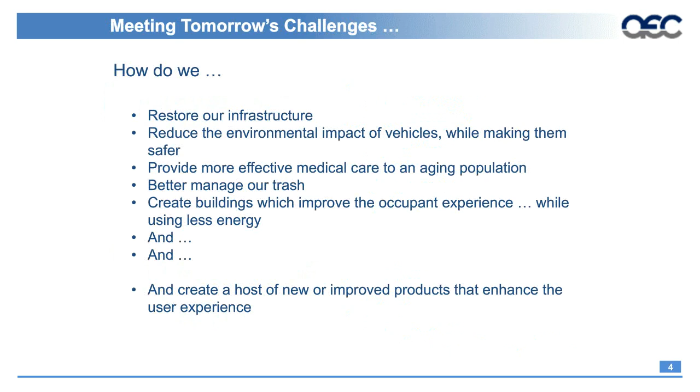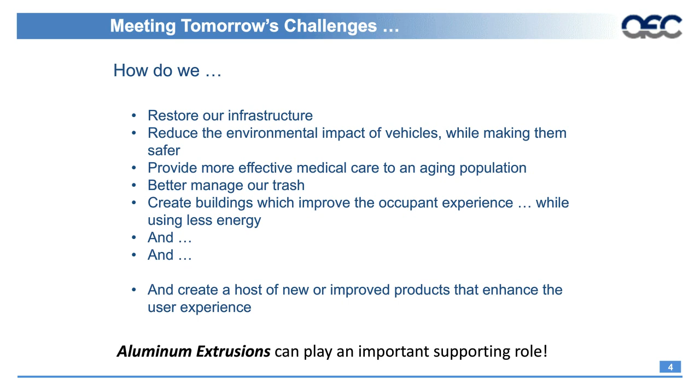Today what we're going to do is take you through a few real-life examples of what different extruders are working on—improving not only our infrastructure, but also working on vehicles and improving the impact systems of vehicles to make them safer, as well as working on a variety of life-enhancing medical products that enhance not only patient care but also help reduce costs. We will start by reviewing the extrusion process overall, and then we'll get into some of the different products and applications, as well as more detail within the aluminum extrusion industry.

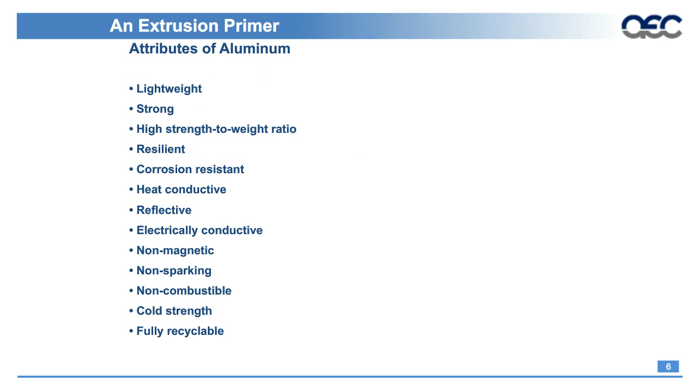Obviously, we are aluminum extruders, so our material of choice is aluminum. Aluminum has a variety of benefits: it's light, strong, lightweight, and resilient. Corrosion resistance is probably its most key attribute. When we marry aluminum with extrusion, we have the ability to tailor the performance or profile to meet specific needs. We're able to produce complex shapes, apply a variety of different finishes like anodizing and paint, as well as make hollow profiles that are relatively consistent and uniform throughout the production process.

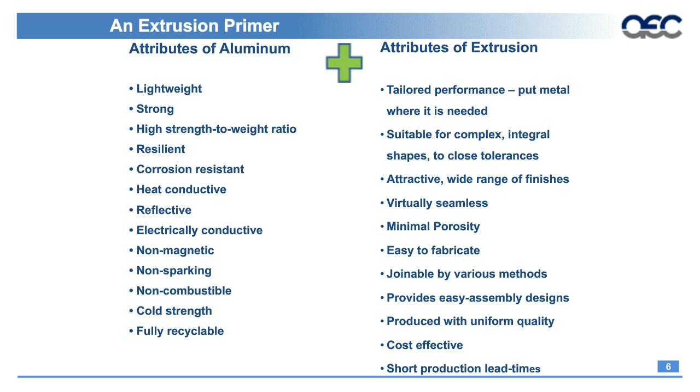As aluminum extruders, I think we're all very familiar with this example, but in its very simple form—maybe some of us had the opportunity to have one of these as kids, or have kids who have had these—think of the Play-Doh machine. What we do is basically take a piece of aluminum, force it through a steel die, and out the front comes the particular extrusion we're producing.

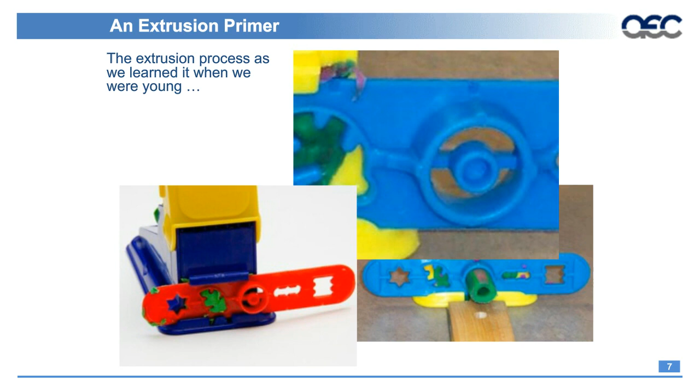For this particular example here, just basically see the die in the middle. Obviously, you have the billet to the left, and then the extrusion emerging through it. So it's nothing more complex than that, really.

Obviously, all the features of the extrusion itself are built into the die and how that actually forms the material. So it's overall relatively simple.

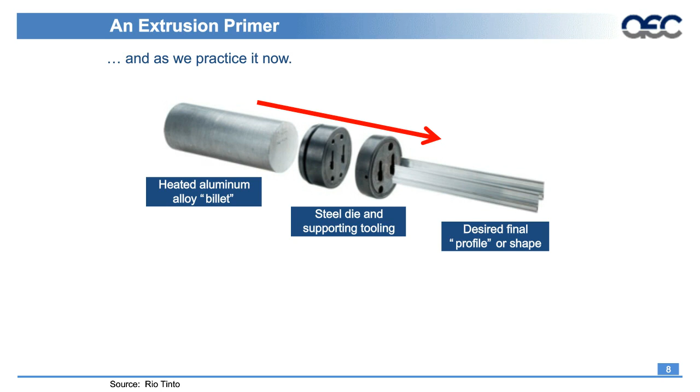However, as we begin to look at the different parts of the extrusion production line, we begin to understand that it is more than just a die or more than just the extrusion press. In fact, what we're actually doing throughout the extrusion production process, in order to achieve the different tempers we're looking for and the variety of different alloys that we produce, at the end of the process we're going through a variety of heat and cool down cycles to make sure that we're treating that aluminum alloy in the right way to achieve the final properties at the end.

So in this particular instance, you see a very basic diagram of most of the extrusion process. There is some additional ancillary equipment towards the end if we're looking at packing and doing things like that. But the actual production of the extrusion itself, we start by preheating the billet before it goes into the extrusion press. So we'll preheat the billet.

We'll present the billet to the extrusion press. We will press the billet through the die, and that will run out basically down the table that sits in front of the extrusion press, and then we'll do a hot sawing operation where we'll cut that long extrusion to a piece. Then it moves transversely to a stretching system where we'll straighten it, and then a finish saw operation where we'll cut it to basically a rough cut length.

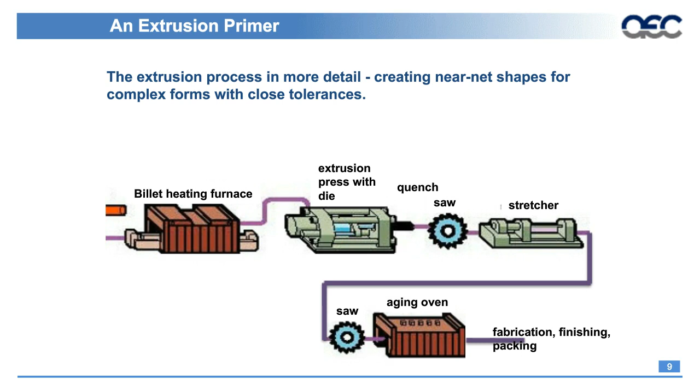So again, I mentioned about basically the heating and the cooling process. So what we're doing in that, and you can see from this diagram, starting on the left, which is basically down around room temperature, once we start to move that billet into the billet heater, we're beginning to heat that up, and that process takes a very varying amount of time depending on the diameter of the billet being pushed, or the length of the billet, or the alloy. But there always is a prescribed recipe for that particular shape as to what temperatures you're trying to achieve along the way.

So you can see, starting from the left and moving to the right, that basically you're taking that billet, you're beginning to heat it, and you're getting it to a preheated or pre-extrusion temperature of around 800 degrees. Like I said, it will depend on what the alloy and the shape is, but it'll be somewhere around in that area.

But the final heating that occurs to the shape actually occurs during the extrusion process, which is obviously very much all about the friction, the frictional heat that's put into that extrusion. Now what happens during the extrusion process, obviously we're making the final shape that profile is going to be, but then we're also heating it up to the point where all of the alloying components within that aluminum alloy go into solution. So at that time, all of those alloying elements have been uniformly dispersed throughout the cross-section of the extrusion profile, and it emerges from the press.

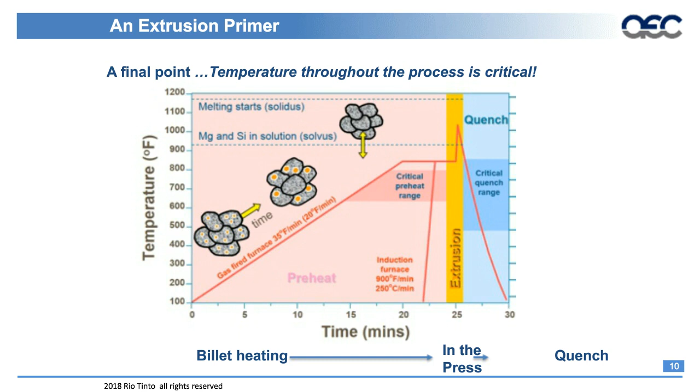As I mentioned in the beginning, we'll talk about some of the different challenges and then some of the solutions that face us today. Over the past several years, we hear different things about the infrastructure, what is needed, what needs to be replaced, and what the opportunities are for aluminum extrusions within that space, as well as healthcare and automotive. All those have some very specific needs where aluminum extrusions tend to offer significant value.

Particularly in the United States today, you don't have to go very far to hit a pothole or even see a bridge that might look like it needs to be repaired. What we do know is that there are over 56,000 bridges that are structurally deficient, which is 9% of the total. If you look at all that, that's $123 billion of estimated rehab based upon current construction methods today.

One of the things about aluminum that we talked about before: it's lightweight, it has a high strength to weight ratio, it's corrosion resistant, and it also has cold strength. What does that mean? In a cold environment, it doesn't become brittle, it still maintains its strength. That's why aluminum is used for airplanes. Go up at altitude where it's minus 30, minus 40 degrees, and the aluminum is still flexible so that it doesn't crack and cause some type of accident with the airplane.

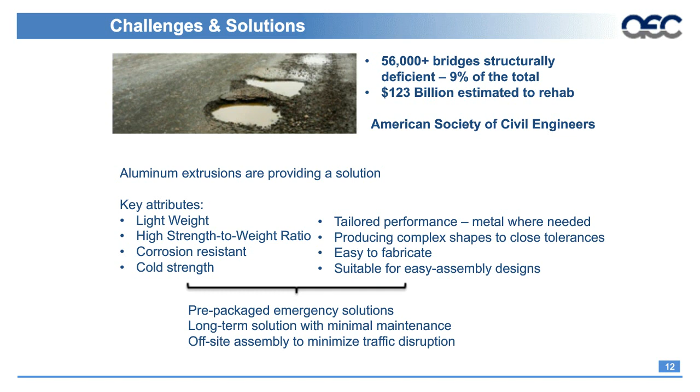So it's one of those things where we can look at all of these attributes combined together, along with the shapes and how everything will basically work together as a system, to come up with a solution that is, I'd say, better and can even be more cost effective than what we're looking at today.

One of the industries that a lot of extruders participate in has some type of military application. In this particular application, you have basically a modular bridge that's able to be assembled on site for foot traffic, moving small equipment, different things like that. But the biggest thing about this is, due to the lightweight and the way you can actually design the extrusions, you can erect this in the field with minimal amounts of tools and equipment. That's very important to a mobile military.

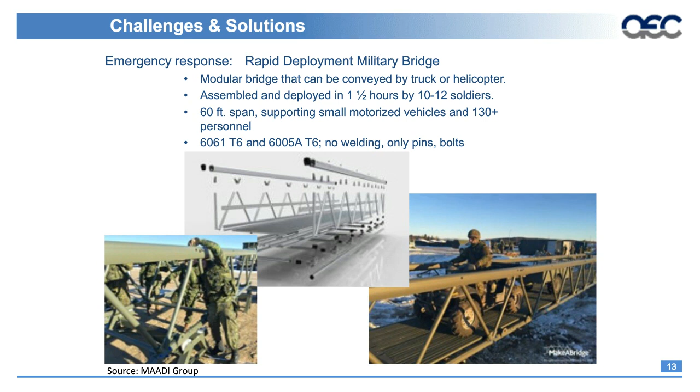But probably more important to us in the civilian world is the fact that a lot of these bridges are deficient. One of the opportunities for one of the products designed by a company called AlumaBridge is actually aluminum bridge decking. There's been several of these bridge decks already put in place. There's been extensive studies done in the state of Florida on bridge decks and looking at ways to utilize a bridge deck versus steel grating construction, concrete construction, and all the different methods out there today.

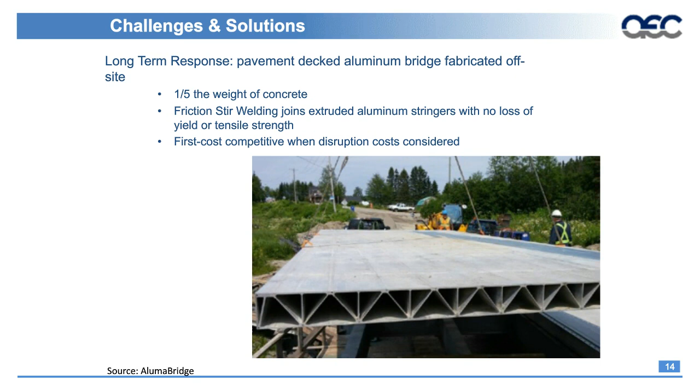In this particular bridge example, you actually have several very large extruded multi-hollow sections that are friction stir welded together off-site. So basically these bridge decks can be pre-built in a modular fashion and then moved to the bridge site. This decreases the amount of time that bridge is actually out of service, which is a key part when we think about daily life and the interruptions you face during construction. So with the aluminum bridge deck, you're looking at a rapid deployment of a bridge.

So there's definitely a lot of great opportunities out there to look at aluminum in infrastructure applications, where not only will it save costs because the supporting structure of the bridge doesn't need to be as robust to take the weight of the deck, but you also look at the speed at which you can implement that new bridge and basically reduce the amount of disruption to traffic flow.

Another great opportunity to talk about is within the healthcare industry, whether it's a patient comfort or a cost issue. We can look at aluminum extrusions as offering a potential solution to a problem.

Again, usually with aluminum, we're always talking about the weight implications. So the lighter a component is, typically the less structure it's going to take to hold that, to support that as it's in use.

The non-magnetic, non-sparking, non-combustible attributes of aluminum are very important when we're talking about healthcare and parts being in the vicinity of a patient, sometimes right next to the patient.

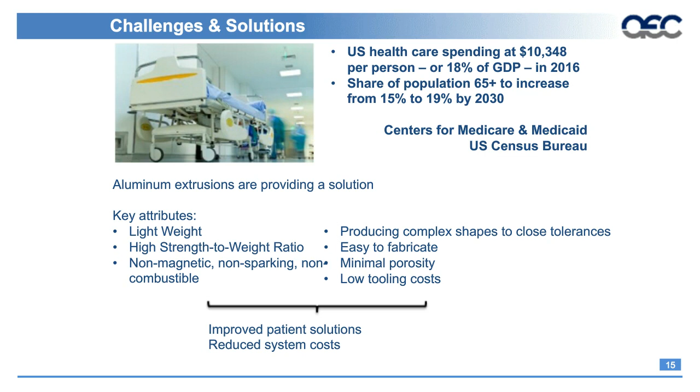But because of all the different leaves, they had a tendency to break, and therefore the machine would go out of operation. I think we've all been in a situation where we've had to get in for some type of test, and if the schedule is blown because the machine is down, you have to rearrange your whole time and try to get back again. Not a very comfortable feeling.

So in this particular instance, they wanted to reduce downtime, but they really wanted to reduce their part cost at the end of the day. They wanted to make a more efficient machine, and they wanted to be able to build it more efficiently.

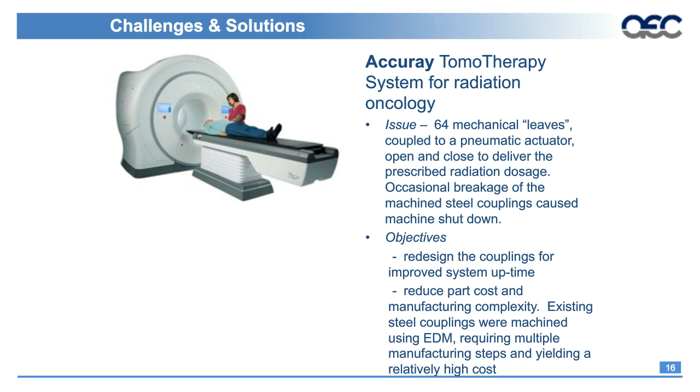In this instance, this coupling was replacing an EDM steel coupling. They used a 6063 machined aluminum extrusion that was hard coat anodized. Because of the extrusion process and being able to basically move the metal where you need it within the profile, they were able to improve the strength and durability of the part.

They also had the opportunity, because of the extrusion and fabrication processes, to build in an identification mark on the part, which is very important for traceability. If you do have a malfunction, you'd like to be able to trace that back through the supply chain and identify any reasons for the failure to make improvements.

In this instance, on the bottom, you can see the fully fabricated part, which was actually a snap fit. It reduced the manufacturing cost by nearly 90% and the production time by 75%, so it became a very cost-effective part to produce.

But the more important fact is, through 10 million cycles, it didn't have any failures, which provides a lot more uptime for the machine. So not only are the patients happier, but the hospital system is getting more people through the machine, which makes the hospital happier because they're collecting more money at the end of the day.

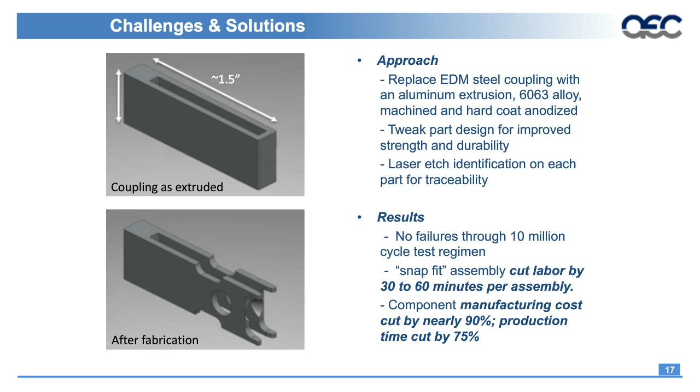One of the things about extrusions and aluminum is that speed to market is always very important. Here's a particular piece of equipment used to aid in the turning of a patient on the bed, which is actually a very time-consuming task for hospital care staff repositioning patients.

In this instance, there were seven extrusions joined together that worked together to aid in turning the patient, which they were able to do in 10 seconds versus a much longer time than it had taken before.

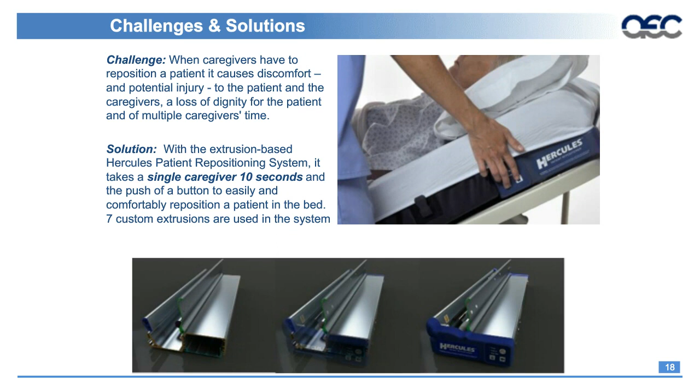Obviously, much of the time we start talking about the automotive space. Over the last 5 to 8 years, aluminum has begun to, or has, taken off on a very fast trajectory of being utilized more within the automotive space.

Again, within automotive, there's talk about lightweight vehicles - way lighter today, with the high strength to weight ratio, resilient, corrosion resistant. But I think the biggest opportunity within the automotive space is to be able to tailor the performance of the product, which we'll see in a little bit when we start talking about the crush boxes and bumper beams, and all of those types of energy absorbing components, where the consistency of extrusion throughout the process leads to very consistent products which perform in a predictable manner.

So it's one of those opportunities I think that we rarely see within a particular industry, and for extrusions there's a great opportunity to continue the growth process as new vehicles are developed, whether they're an internal combustion engine, a hybrid vehicle, or an electric vehicle - much of the same attributes play into all of those different vehicle types.

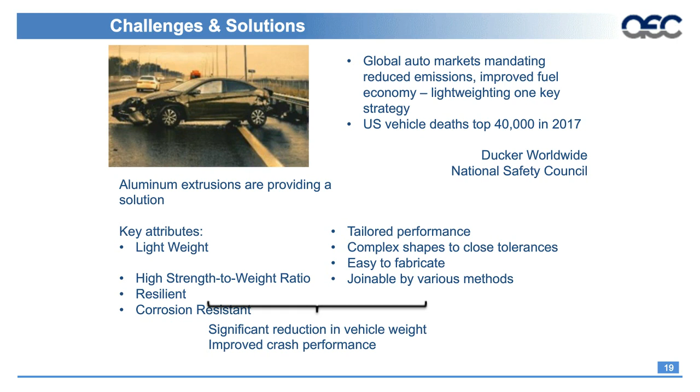So here's a little bit of information as far as the growth and the projected growth of extrusions within a vehicle over the next 10 years, starting in 2012. But again, you see some of the different areas where they've been used. Obviously different vehicles have different designs - again, it goes back to easily tailored.

A lot of times, extrusion dies are one of those things that, depending on the size of the die, will really garner the size of the profile. But typically for a relatively complex hollow shape, you could be looking at somewhere around $5,000 to $7,000 for a die, versus sometimes in the stamping world you could be talking about hundreds of thousands of dollars for a die to be able to stamp a part. So it's quite a bit different when we start talking about new tools and what you can do.

I think the iteration process is a lot faster within aluminum extrusions than it is with some other types of metalworking equipment, whether you're talking about castings, forgings, or stamping operations. You have a lot more freedom with aluminum extrusions to iterate new designs, because typical lead time for a die might be 5 to 7 weeks, depending on how complex it is and where it comes from. So it gives you that ability to move that process a little bit faster.

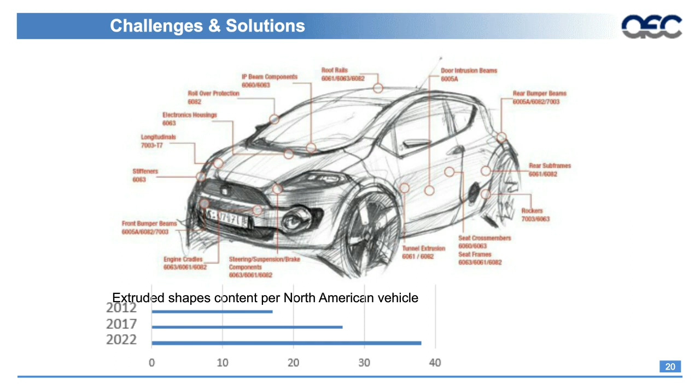Obviously, over the last few years, the Ford F-150 has been a great story when it comes to aluminum - not only the weight savings, but the fuel savings, and also the safety performance of the vehicle itself. And here we talk about one of the crush cans that's specifically designed. You can see on that upper right-hand picture on top there, where they're actually pre-dimpled, so they're made to begin the crush process within there.

So at the end of the day, look at the weight savings, which translates to fuel savings. Obviously, even the weight savings not only transfers to fuel savings, but then also you talk about less mass of the vehicle, so there's less force to have to absorb in case of an impact. So there's a lot of things that you begin to gain through weight savings and being able to tailor the profiles to the specific application where they're going to be used.

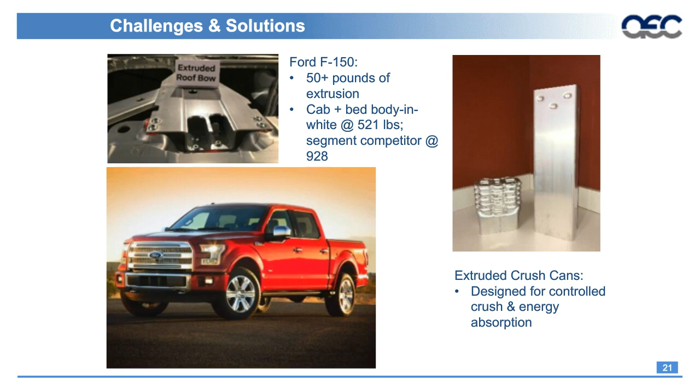Obviously, one of the things about aluminum as a material itself is the recyclability of that material. Since aluminum has been commercially produced, about 75% of all the aluminum that's ever been made is still in use today. That's one of the things where you start talking about the recyclability of the material itself. So keeping materials out of landfills is obviously very important, and aluminum actually has a very robust recycling industry behind it that will take that material and put it back through the value stream, and new products will be made out of it.

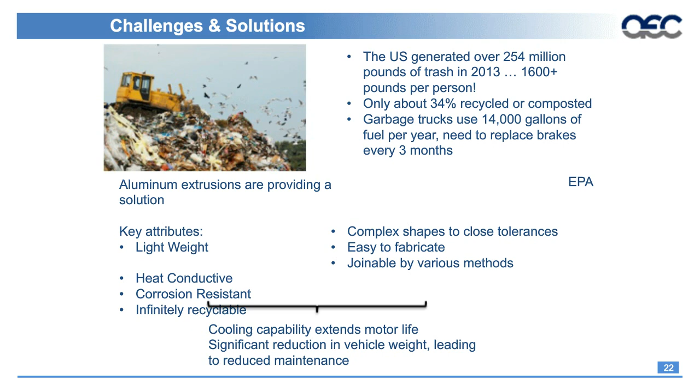In this particular challenge or solution, we start talking about garbage trucks, right? Everybody's garbage needs to be picked up. So in this particular one, we're talking about turning the dirty diesel garbage trucks into electric vehicles. And how do you do that? Obviously you need an electric motor to do that, and typically those electric motors have some type of extruded aluminum housing around them.

So in this particular one, you can see that at a little bit over 5-inch ID on that profile, but all the different small hollows around there increase the surface area for the cooling fluid for the motor. That's one thing that we do a lot here at Taber - although this isn't our specific example, we have a large press and we make very large multi-hollow extrusions used in a wide variety of motor applications. So in this particular one, you have a 250 horsepower electric motor that's housed in an aluminum extrusion, basically on each wheel.

So another very innovative way of using the ability to design and put the material where you want it. Instead of having to build something up from a weldment or something like that, we just basically extrude all the features into it.

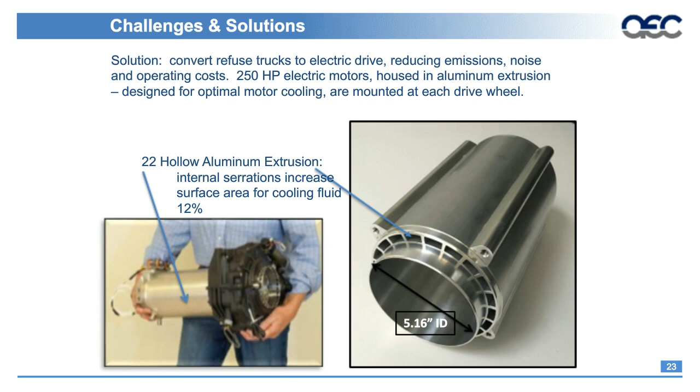So in order to do all that, we have to have a good understanding, or at least a general understanding, of what solution you're trying to develop. Right? Any supplier would tell you that early engagement is always good, and through that your supplier can help you walk through what you're trying to achieve.

And then how do we get there, fitting within a production process most efficiently. So over the next several slides, we'll go through alloy and temper, extrusion geometry, get into a little bit of the microstructure, and when we start talking about structural automotive applications, what we're trying to achieve during the extrusion process. Lastly, we'll talk about additional fabrication and finishes possible with aluminum extrusions.

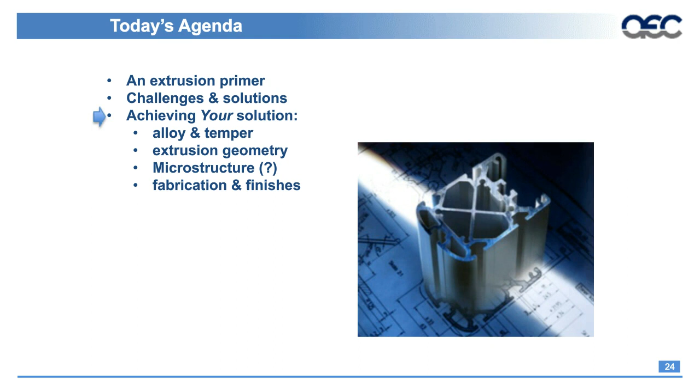But typically when we're talking about aluminum extrusions, we're talking about 6000 series alloys. There's a wide variety of different aluminum alloys out there, but within extrusion, general extrusion is usually a 6000 series. Although all of these particular alloys can be extruded, they're not always readily available. So within what we typically talk of in aluminum extrusion, it's a 6000 series alloy.

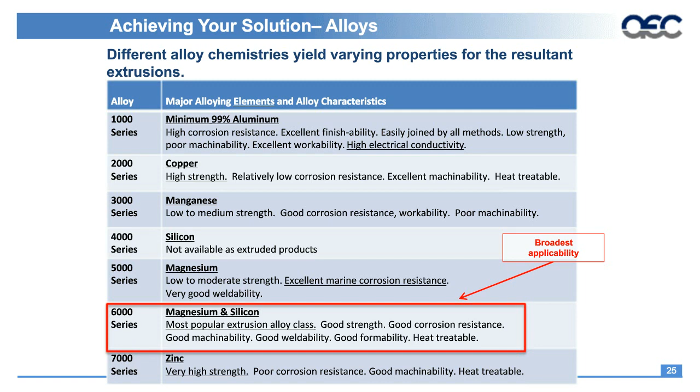Those are primarily all rolled product - sheet, plate, different parts like that in the 5000 series range. 6000 series typically for extrusions, although there will be 2000, 7000, and 8000 within aerospace applications. Some automotive applications, specifically bumper beams and other high impact parts, may use a derivative of 7000 series alloy. But mostly we're talking about 6000 series.

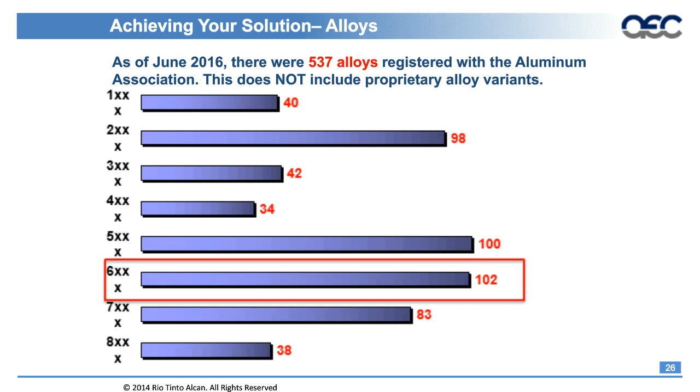There we start talking about some of the structural applications for automotive, a lot of marine, non-corrosion marine applications are using 6082. But also where you might see 6082 is if you see basically a transfer of an extruded aluminum product from Europe to North America. A lot of times the Europeans will use 6082 as their go-to 6000 series structural alloy, whereas in the U.S. we're typically more 6005 and 6061.

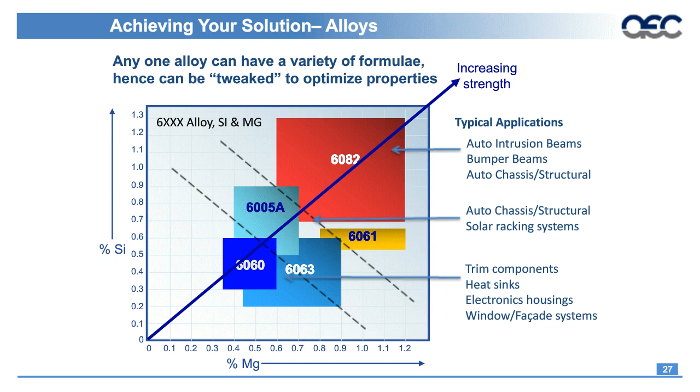So if we go back to where we're talking about how we heat the billets, and then we put the material in solution as it goes through to the extrusion die, and then we quench it - that's where this becomes very important, because that magnesium and silicon become basically combined mag silicide within the grain structure or the microstructure of the alloy, and that's where you achieve that strength.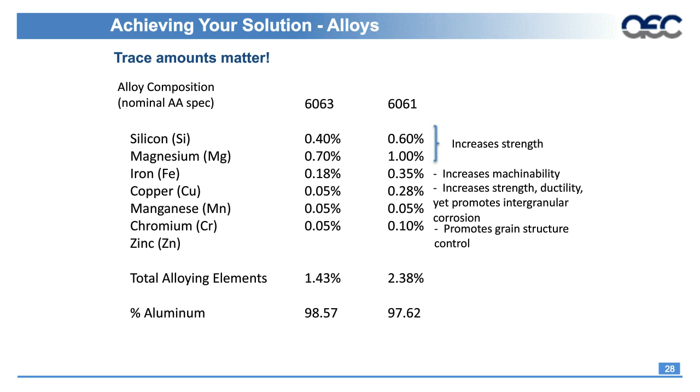So usually, when you talk to an aluminum extruder, they're always thinking about pounds per hour. Pounds per hour for us is what typically dictates price. So the faster we're going to produce something, typically the lower cost it is to produce.

But one of the things with higher strength comes lower production, typically coming out of the press. So that's something to think about with alloy selection. Do you need something like 6082, which has a lower extrudability index than 6005A or 6061? Or is 6060 or 6063 good enough?

That's some of the things one needs to think about. There are sometimes ways to overcome the strength with extrusion design versus just the material itself. I think that's one of the opportunities you can look at when designing shapes: look at the overall design and how it all plays together, and build it into the shape rather than relying on the alloy to do it.

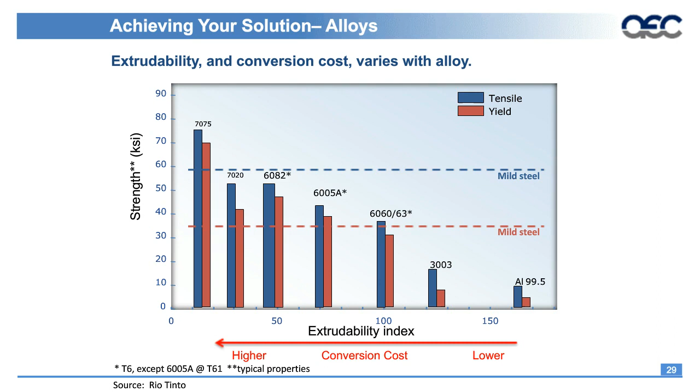So usually you always have an alloy temper combination. Typical tempers are F temper, O temper, and through the T's - T1, T4, T5, T6. There can be variations on that, just depends. The H tempers are strain hardened, and the 5000 series will have an H temper designation after it. But typically when you're talking about extrusions, you're going to be in the T tempers or F or O temper.

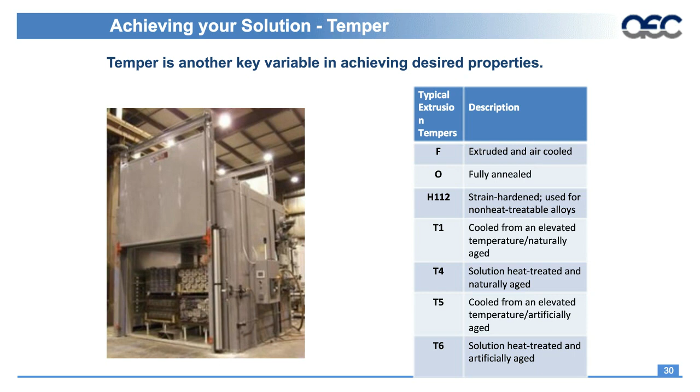Also, keep in mind that once it emerges from the extrusion press, it's going to be quenched. The quench affects a uniform shape the same way all the way around, versus a shape that is not. If you have a mass off to one side, that's not going to cool as fast as a thinner section on the other side. That thin section is going to cool faster, and therefore you're going to get a bow or a twist - something that may not lend itself to a more uniform part coming off the press line at the end.

So uniformity and some symmetry are all kind of around the same type of thought process. We like to keep things even.

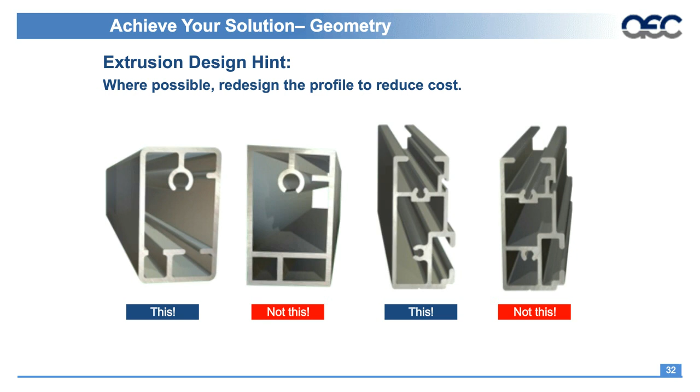If you don't need to necessarily enclose the internal void, if something's just going to slot in there, you can definitely open that up so you don't have additional material that you don't really need, because those voids will just add walls forming them that add weight that's not necessary. There are different options, and the extruders are always willing to help look at opportunities to save weight and cost.

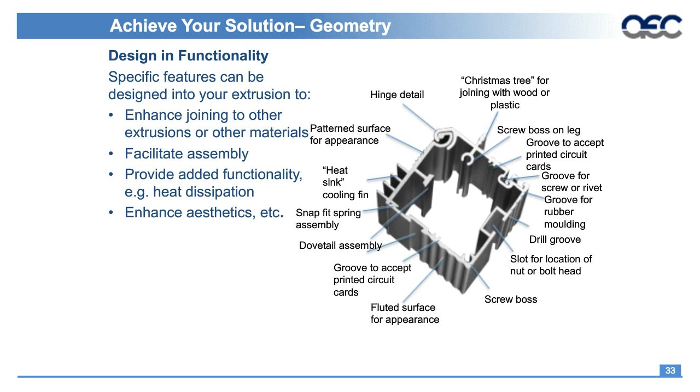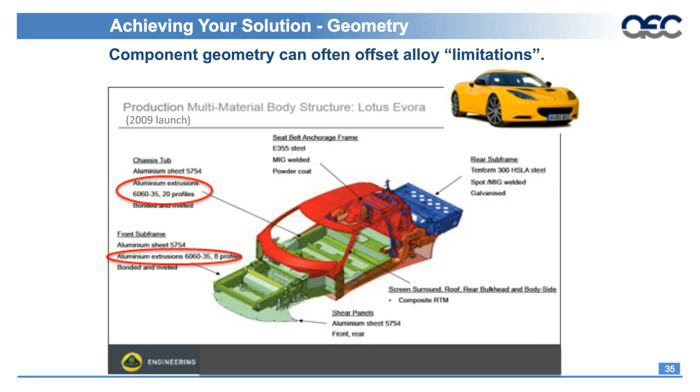Now let's talk a bit about geometry and some things you can look at to offset the limitations of the alloy. Here's a very interesting example with the chassis tub. In the upper left-hand corner, that's actually 6060 alloy, and if you remember, that was one of the softer 6000 series alloys we have, typically not used for structural applications. Same thing here on the front subframe, basically everything in green on the car. It's very interesting that you can adjust and use geometry versus metallurgy to create the part that's needed. You get an idea of what these components look like—very purposefully designed for that part of the automotive and how it has to perform.

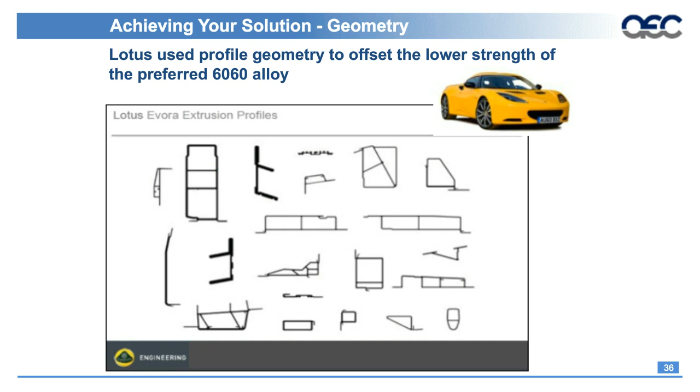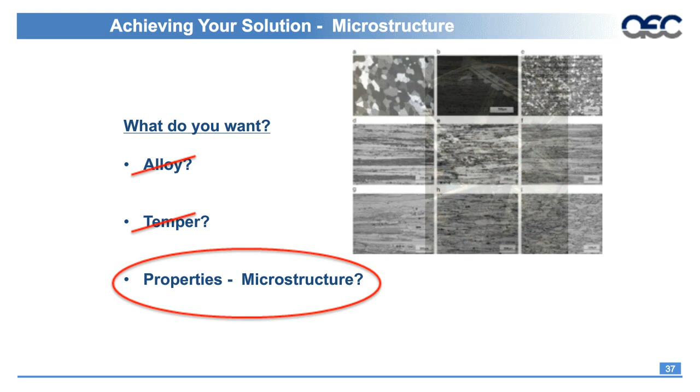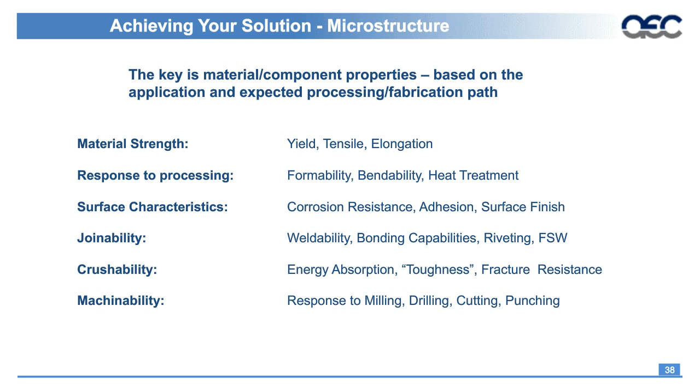So again we start talking about microstructure and what we want—very important when we're into automotive applications. It's good to understand what the material strength is, how you're going to join it, how you're going to crush it, if you want to machine it, and the surface characteristics. All of that is important when it comes to alloy selection, temper selection, and even selection of a vendor, because not all extruders are created equal, and different extruders are capable of producing different types of shapes. But at the end of the day, we're looking for these grain structures that really enable the shape to perform the way it does.

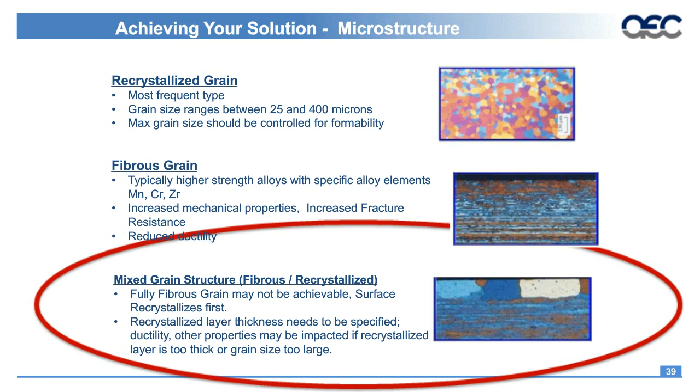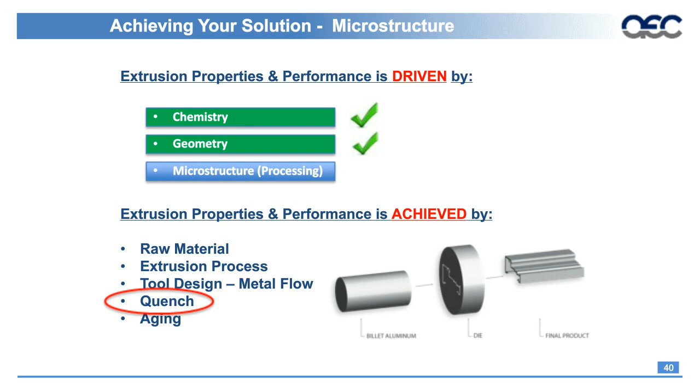And again, we come back to quench—very important. We can do everything right, the alloy can be right on, we could get everything through the die as we need to, but if we can't quench that part correctly, it's not going to come out right after we've gone through the tempering cycle. So again, we come back to heat—the billet heating, the press, and then the quench. Very important when we talk about it, and an extruder is always going to have that in mind when looking at your shape to understand what they need to do.

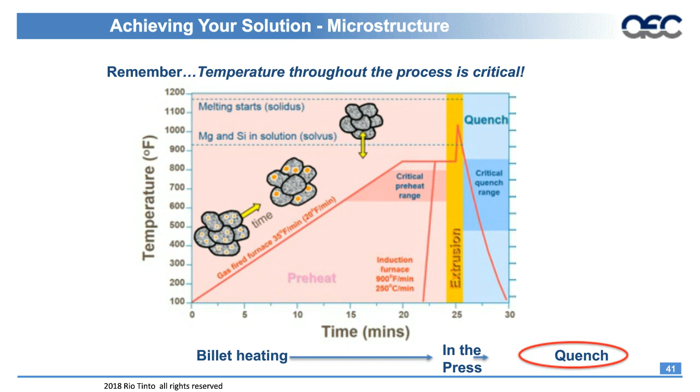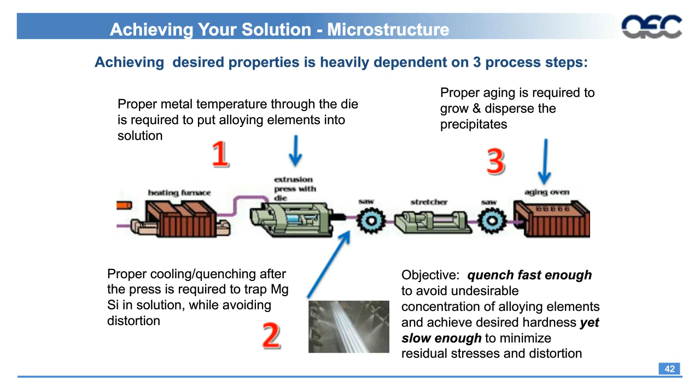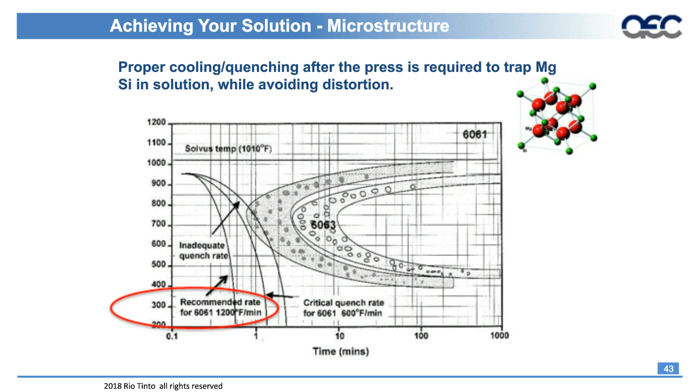As we start to wrap up, we get into some of the different value-added opportunities beyond aluminum extrusion. We look at fabrication and finishes. Finishes means painting, wet or powder, anodize, all the different architectural shades and colors.

Mechanical finishes: talked a little before about aesthetics in extrusions—we can brush them, we can polish them, we can do different things to make them look nice. And then obviously applying different types of stickers, and there's all different kinds of appliques that are put onto extrusions.

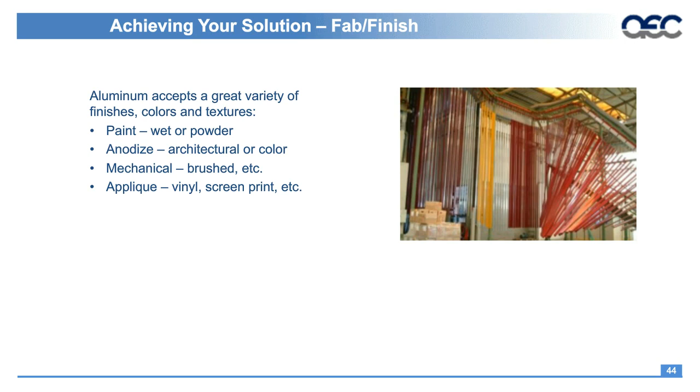Finish is a very important part of understanding what alloy is needed. Not all alloys anodize the same, so that's one of the things. If you have an idea of what type of finish needs to be on the part in its final application, that would be a good discussion point at the beginning.

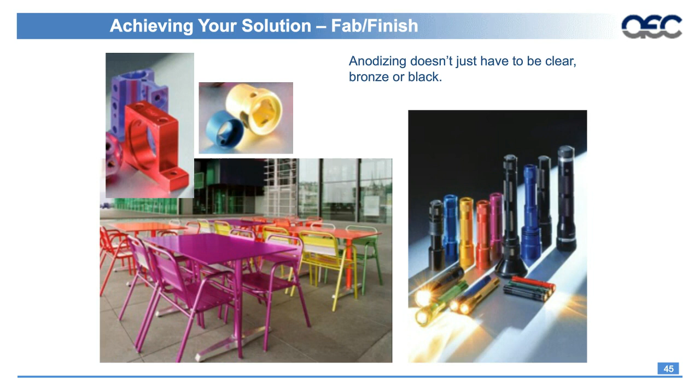Fabrication—there's a wide variety of different fabrication types: CNC machining and bending, simple punching and cutting, friction stir welding. There's a whole world of fabrication out there, and most extruders offer at least some type of fabrication.

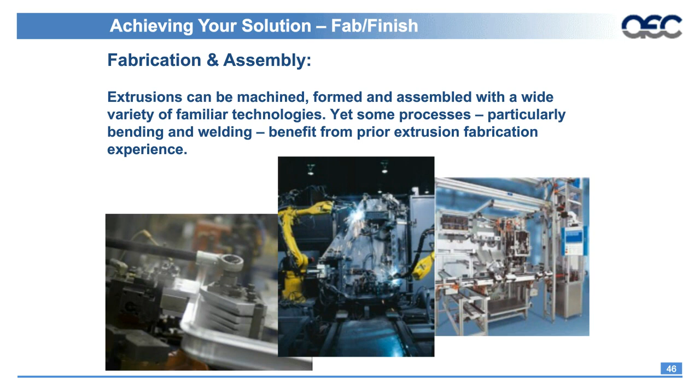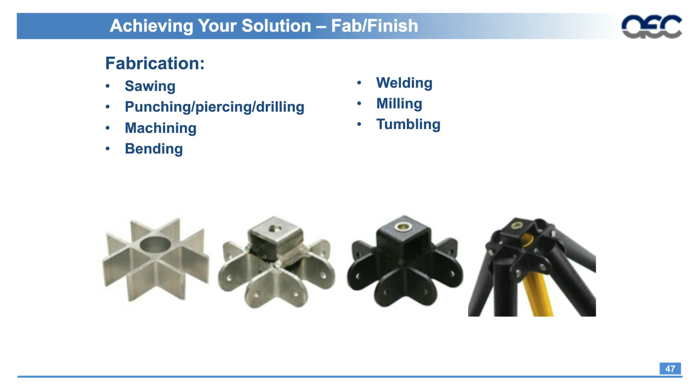So in the end, it's really all about what do you want, where do you want to get to, and then we can talk about what road we take to get there. Definitely a lot of opportunities, as discussed earlier, with automotive, medical, and infrastructure applications, but it's really a world of opportunity out there when you start talking about saving weight and improving the products and making them last longer.

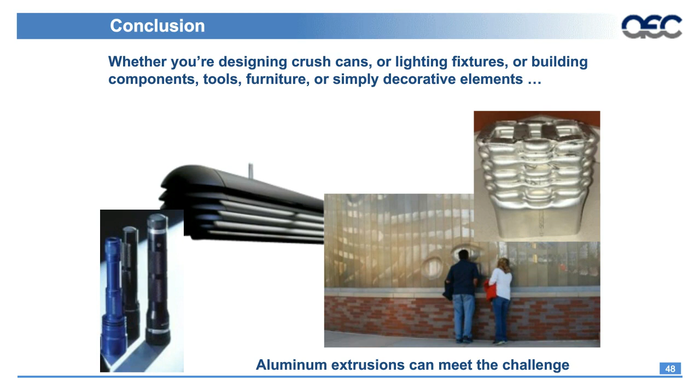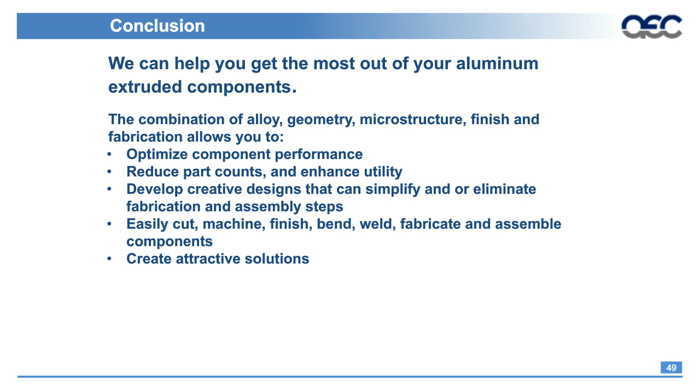At the end of the day, I think all we ask is, as aluminum extruders, we want to help you. If we understand the combinations of the alloys, the geometry, the microstructure, the finishes, and the fabrication, and how it all works together, it'll help us help you create the best solution that you can. But as always, early engagement, early involvement, leverage our experience. Chances are we've been there before, we've seen it, we've done it. We can help steer through the world of possibilities.

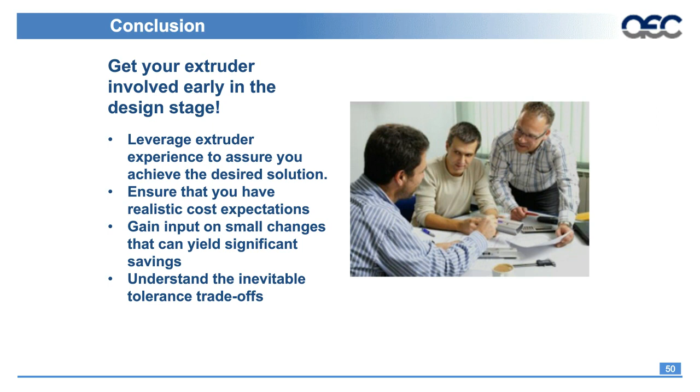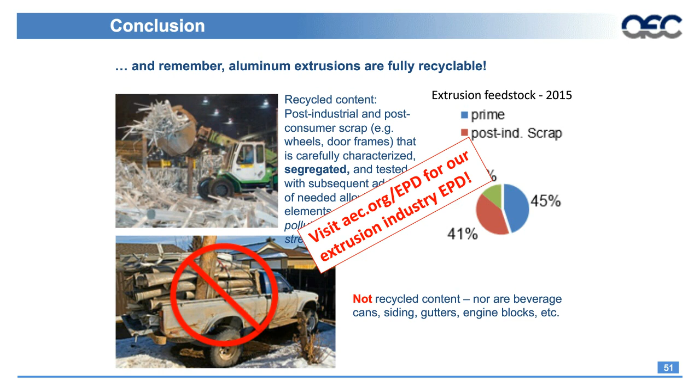As I said before, aluminum is fully recyclable. It's a great way to improve your environmental footprint. If you visit AEC.org, there is an EPD out there that is fully downloadable on the extrusion industry. If you're more on the architectural side of things, we do have a life cycle assessment as well that's available. All those are industry publications available to you. Again, AEC.org, there's a lot of information out there.

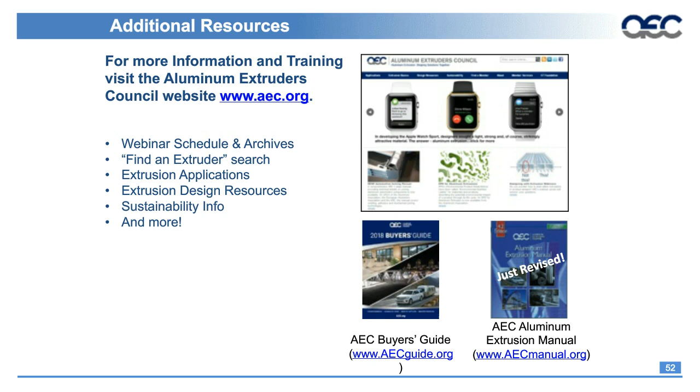There's design manuals. You can even search for an extruder if you don't have one, or search for a different one if you need one. Lots of different resources there to pull from. And then the Aluminum Association publishes the Aluminum Design Manual, the current 2015 edition, and that goes through everything having to do with aluminum extrusions and other aluminum products as well.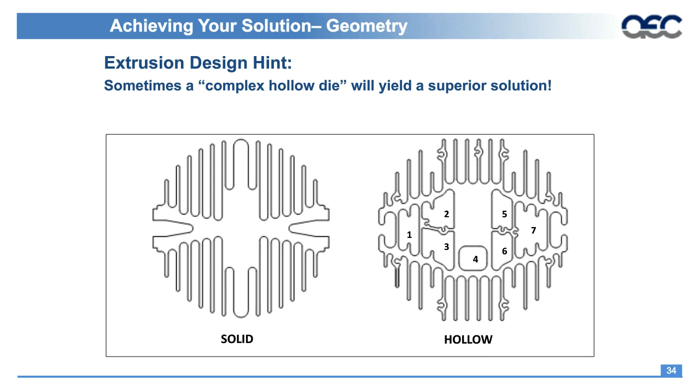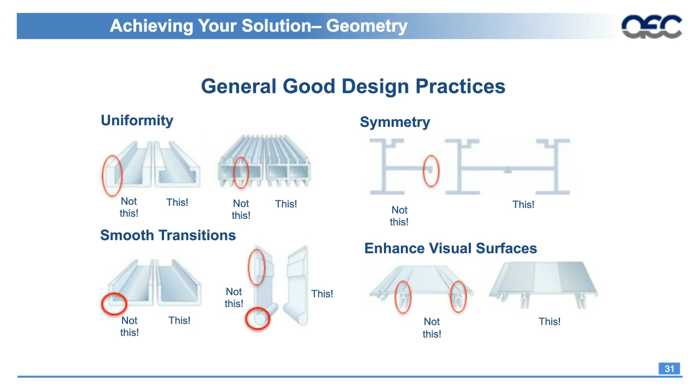All right, can you give a little more detail into how geometry can improve strength? Maybe an example? I'm just trying to think if there was really a good example. I think a good example of strength, as far as bending along the cross section, would be the difference between an I-beam versus a rectangular tube. If they're both standing up, long direction up, the rectangular tube, because you basically have two vertical walls, is going to be a much stiffer part than an I-beam, which typically only has one wall. So a lot of times, even if you make that, you can achieve the same strength with the extruded hollow rectangle than you can with an I-beam that's usually bigger and taller and wider. So, I think even in the aluminum design manual from the Aluminum Association, it will talk about the strengths of beams and the differences between how to calculate on a hollow versus a beam.

Okay, can you talk a little bit about some newer applications for extrusions in automotive?

Newer applications - we're seeing a lot more, not only in structural parts like the front, things like bumper beams and crash boxes, but now getting into the understructure, the sills that go alongside, and some of the cross members underneath the truck or on the back of the vehicle. I'm not an automotive engineer, so I can't talk specifically about part names, but there's also integration now with electric vehicles - integration of battery boxes and cooling features into those battery boxes or into the motors, like we saw with that garbage truck motor example. It's becoming more prevalent in different parts of the vehicle where you might replace a stamped part with an extruded part, plus integration of cooling features needed in an electric drive. With the advent of the electric vehicle over the last 5 to 8 years, we definitely see a lot more electrical cooling applications than we have normally seen before.